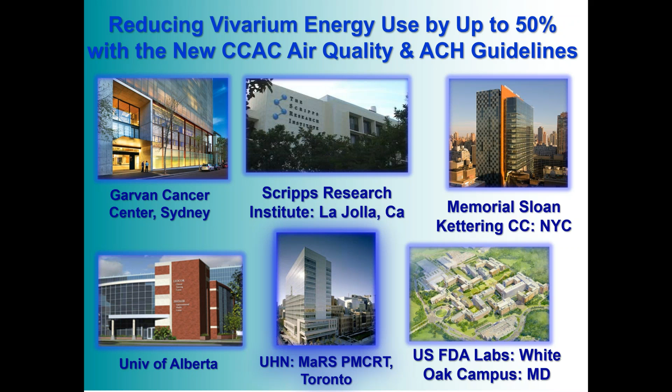So what I want to get into is a little bit about demand-based control, a little bit of the guidance from both the U.S. and CCAC, ILAR, and more details about the guidelines, the addendum coming next year regarding that. Also demand control and how the supporting committee moved the way it did, and then a little bit about the economics and why it makes sense for people, particularly up in Canada.

With that in mind, let's get into this. So, I want to reduce energy in vivariums. The key driver for the HVAC system is that it's 60 to 80% of the total energy use of a vivarium. Regarding high-rise facilities, it's definitely the dominant factor by a far margin. And the air change rates required in vivariums, at least...

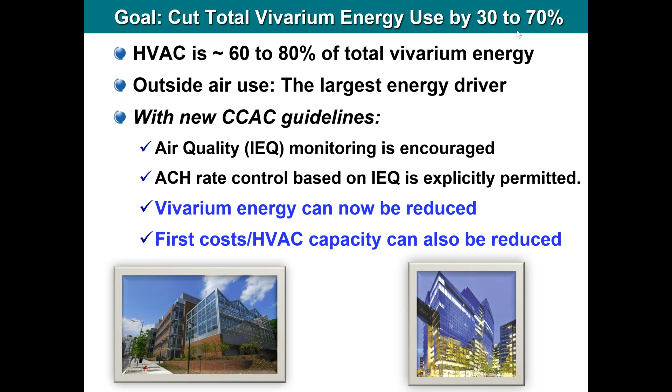Now, with the new guidelines, they get into the issue of air quality within and encourage the use of monitoring for that. But also, if you want to reduce the energy use in the vivarium, then a demand control system that reduces based on the measurement can both dramatically cut energy use, but also HVAC capacity and first cost. And it wasn't allowed before, but now it is allowed with the new guidelines, which we'll get into.

So again, a little bit about vivariums and the various aspects. I think it's always important to understand and get grounded on how airflow requirements work at these different levels and how they are controlled. What we have is three main drivers of airflow within these facilities, vivarium or lab. We have exhaust requirements - this could be biosafety cabinets, could be exhaust from the animal racks. These device airflows result in a need to compensate. That one requirement is based on the amount of devices, and you can change based on what the devices are doing. If we're talking about animal racks, we have racks that are less or more, and they affect the airflow as well. In addition to that, we have a thermal load component.

Maybe I can interject just really quickly, Gordon. We're having a little bit of distortion in the audio in your presentation. Is there a way - just wondering if you're currently dialed into audio by phone or if you're connected through computer-based audio? I'm using the phone-based audio. Okay, and are you on a voice over IP system? Just a regular cell connection. Interesting, because the audio seems to be garbled at times, but right now you sound fine. So maybe what we could do is continue, but it does seem to be getting distorted off and on. So we'll monitor it, and I might have to interject to see if we can source a different audio connection, or maybe switch to computer-based audio if it continues. So let's continue. Yeah, we'll see.

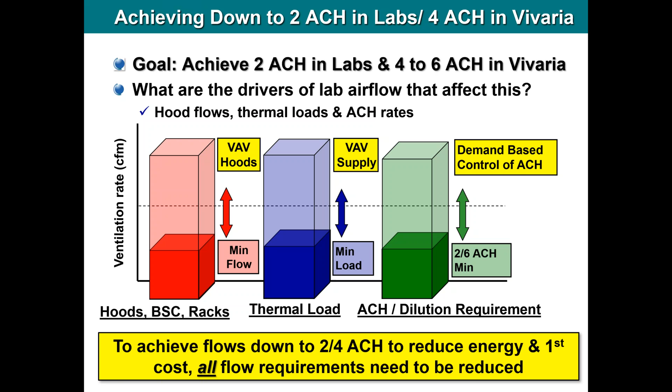The other aspect can be the requirements for the thermal load. So let's take a look here. When you look at animals, and even with ventilated racks, you have a requirement typically in the range of about 4 to 8 air changes. It depends on the racks and the density, but that's typically the requirement.

Sometimes people think that since the rack is exhausting air, even if exhausted directly into the ventilation system, that takes away all the heat. But actually, most of the thermal load is due to radiation from the rack itself. You can't get rid of it just by exhausting some air - it helps a little bit, but most of the load goes right into the room.

So typically for these spaces, to cool the space based on a typical animal loading, you're in that range of 4 to 6 air changes - we won't be able to get below that. So we're going to reduce airflow, but we have to provide at least enough to maintain that thermal load, the cooling requirements.

Now, non-animal holding areas - in a vivarium with many different rooms, we have the animal holding rooms, we also have rooms for surgery, for different aspects of engagement with the animals, cage washing, etc. In these spaces, we don't typically have as high a thermal load, so we can reduce it down to maybe the range of 2 to 4 air changes.

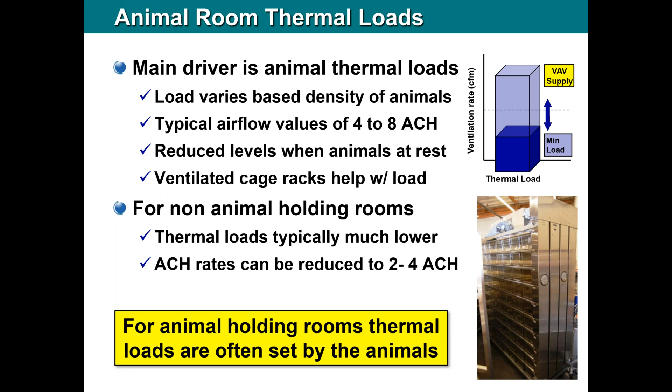The driver for airflow in these spaces has traditionally been the ventilation requirement, and that's where demand-based control comes in. The idea is that these requirements exist due to the potential for pollutants and contaminants - particles, particulates within the room, ammonia, volatile organic compounds (VOCs).

So the point here is that if we can sense when the air is clean, which turns out in vivariums to be very high - typically in the range of 98%, or for some spaces maybe 96 or 99% - it's at that very high level most of the time the air is clean. It's just that things can happen from time to time that require greater airflow, which is why we have it. But if we can sense the contaminants, and when the air is clean, we can reduce the airflow.

When we need that airflow, we want to go up to the 15 to 20 air changes typically recommended. But if the air is clean, we can drop to the lower levels.

This is typically going to be set by, could be the rack requirements, but as mentioned, it's probably more likely the thermal loads that set that range, maybe 4 to 6 for the vivarium airflows. For the non-holding areas, it could be lower, in the range of 2 to 4 air changes. So that's the basic concept behind demand-based control.

The question is, is that allowed? What's been the recommendation around this?

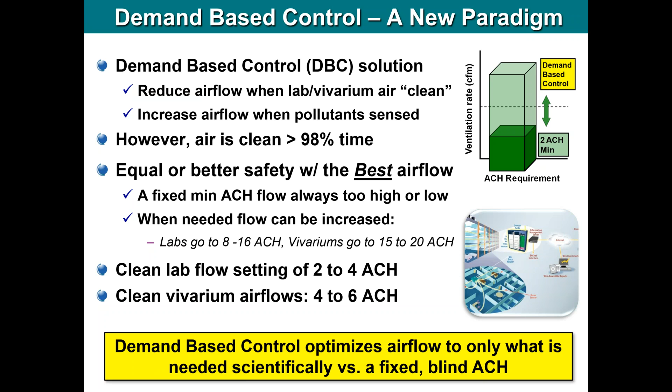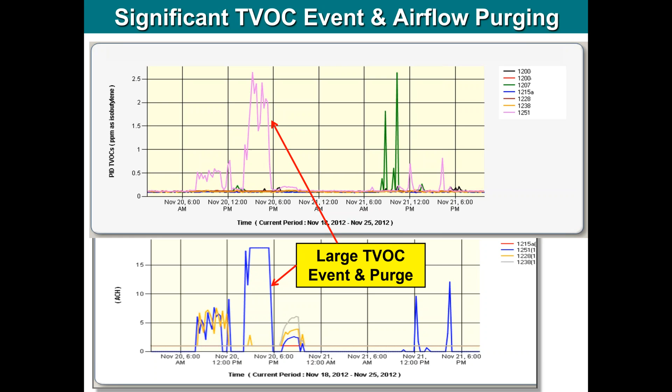In addition to saving energy, there are other benefits to sensing air quality in vivariums, and a lot of it relates to understanding what that environment is. In a research situation, we want to control variables, so air quality within the space can have an impact on the animals, which can have an impact on the research. So it's very important to maintain a clean environment, for both ethical reasons and research reasons.

Monitoring the air quality allows us to assure that we have a good environment, or if things go wrong, we can diagnose those things quickly, understand there's an issue, determine it, and resolve it. Monitoring air quality allows us to ensure that the air quality will be good, because we now have direct feedback of what's happening, whereas typically we don't. You might monitor for air changes, pressure, maybe lighting, but not directly the airflow or air quality, which is such an important factor.

And again, it's not just the animals. Part of the reason for this airflow is also for protection of the people. One of the big concerns here is allergens within the space and people getting sensitized to that. So we want to detect that and make sure the air quality is good and people will be protected from those contaminants.

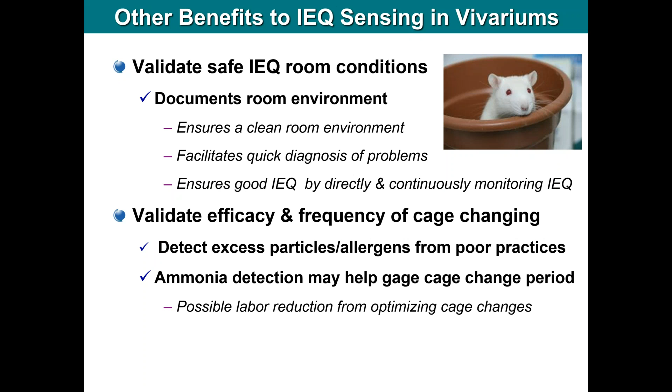The other aspect this is sometimes used for is to look at how often cages should be changed. Typically the reason for the cage change is to prevent buildup of ammonia and allergens within the space, and this provides one way of directly seeing what's happening, and then as needed, optimizing the cage changing frequency. So there's potential labor savings there, and also another way to improve the air quality.

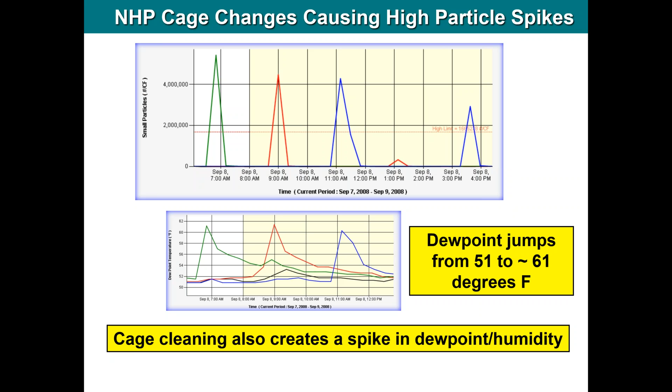What I have here are some diagrams showing the type of things that can happen. This is some non-human primate cage changes where you can see we're creating significant particle spikes, relating to the fact that we're cleaning the cages. You can see not only the particle levels go up, but the humidity goes up as they were washing the cages. During those periods, we would be increasing the airflow. You can see in this diagram that the airflow spikes up to try to purge the space.

In these situations, air quality monitoring is helpful because even though we're providing greater airflow, the intensity of the particles is pretty high. At that point, you probably would be recommended to use some PPE, some protection equipment for the employees, just to make sure they don't get overly exposed during those cleaning processes. So not only can we control the airflow, but we can provide feedback that might improve operations and improve safety for the operators.

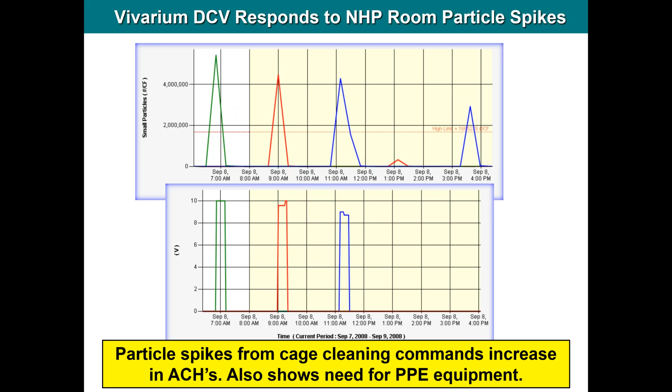What we have now is some information on the guidance around other areas in terms of this aspect of demand-based control. Since 2011, this has been recommending this concept both for labs and vivariums. This guidance specifically relates to laboratories. They use the term real-time sensing of contaminants - that's their word for it, my word is demand-based control, but exactly the same thing. It talks about, at least in laboratories, going down as safely as 2 air changes per hour, when the lab air is clean.

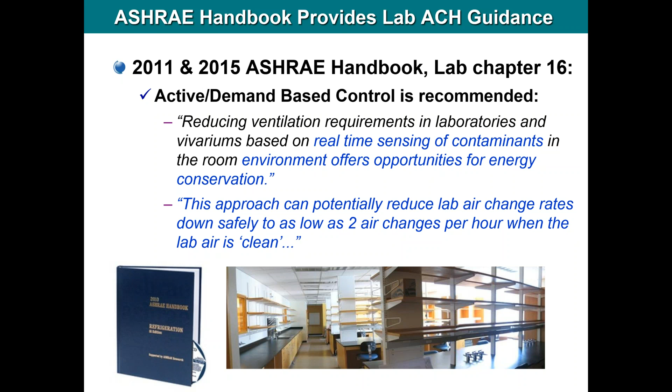So when we get to the vivariums, we have different people weighing in here. ASHRAE weighs in again with a recommendation around the use of active sensing of contaminants. They refer to the secondary enclosure, which is the room. And based on that, you can vary the air change rates.

ILAR, since 2010, has been recommending the concept of varying airflows based on not only heat load, but other variables such as air quality. So that's been in place for some time. AAALAC, which works off from ILAR, also has been actively recommending the use of this concept, allowing you to go below the 10 to 15 air changes.

Part of this is that there's been a drive towards performance-based criteria. That's really what happened is AAALAC moved away a little bit from the prescriptive and says basically trying to focus not just on air quality, but in other areas as well around performance-based criteria, that if you can achieve the end result, then you don't need to be prescriptive. You can allow for other concepts and approaches that can provide a more optimum approach as long as it achieves the intended results, in this case, air quality.

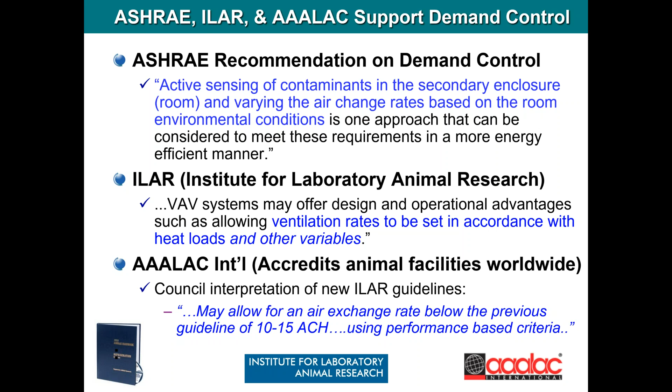So for some time, this has been the case. Now, in Canada, that has not been the case. And in Canada, a little bit different from the U.S. and some other areas, there's been more of a mandate around air changes.

Now, actually, from a global standpoint, the other area where this is true is also the UK. So the UK has very similar guidelines to what Canada has had around this requirement for 15 to 20 air changes. I don't know why those are probably related to some focus in the two countries, but in any case, this has been the case in both the UK and Canada.

Now in Canada, you can see not only is the requirement for 15 to 20 air changes in terms of the airflow, but also the systems, the HVAC system has to be capable of supplying 15 to 20 air changes in each of the spaces. So that has resulted in large HVAC systems that can handle this volume of air, which is going to be needed even if the room isn't being used. Obviously you don't know when that's going to be, so the HVAC system has to have that capability.

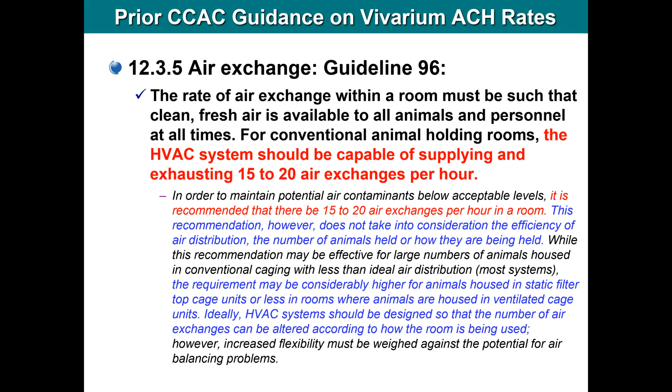And as you can see here, it's even saying that sometimes you may need more than that airflow as well. So this has basically been the requirement up until really this year. And based on this, there was a movement beginning about 2010, based on what had happened with ILAR, based on what AAALAC was then recommending, and seeing this concept being used.

Up in Canada, with the CCAC, they started a movement to look into this. And one of the concerns was to be a little bit more prescriptive around it. If you notice what ILAR and AAALAC have said, it's more performance-based, but it doesn't list what the performance is. That's sort of up to the local facilities to basically determine that and then maintain that over time. So it's like a quality guideline where there's not a specific aspect of what the quality is, but whatever you pick for your requirements, you have to maintain that.

Now, what the CCAC wanted to do is said, well, we want to be a little bit more prescriptive around that. We want to set up what the performance guidelines are, and then based on that, as long as people meet what those performance guidelines are, they can use what airflow they want. So it's a little bit different than, let's say, AAALAC or ILAR, which leave it much more general. Again, the CCAC wanted to be more specific.

So beginning in 2010, there was a move to investigate this, to understand what were either the recommended levels or the levels of air quality that would be prescribed, and then based on that, the airflow could be varied to meet those requirements. So this started in 2010, started frankly a little slowly, but began to get momentum. There were different drafts that came out, some feedback came back, and so it went back and forth several times.

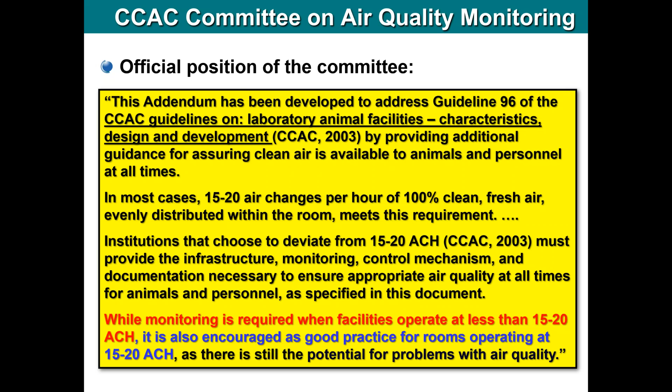But at the same time, a lot of this guideline or addendum focuses on air quality and recommends monitoring of air quality, even if you're not going to reduce the air changes - it's just good practice. And as you'll see, we talked a lot in the standard about what is good air quality, and some ways to monitor it and provide that good air quality.

One of the things that came up when we were doing this addendum was trying to understand what is the cause of poor air quality, or what are the causes of things that can happen within a vivarium space, which relate to why we should be monitoring in the first place, but also why we have air change requirements. Sometimes people say, we've got ventilated racks, they keep contaminants out of the space for the most part, so why do I need higher air changes? So we thought it was important to lay out what we believe were the sources of these contaminants, and we broke it down into 3 different areas.

We generically labeled them systemic, operational, and episodic type situations. Systemic issues relate to system aspects - the design and maintenance of the facility, the HVAC system, how the system is being used. This would be, for example, the type of enclosures.

Is it open cage? Is it ventilated racks? What type of exhaust configuration - is it a direct exhaust, or is it exhausting into the space, etc.? So those were things that affected the air quality, and hopefully they're designed well so that it creates a clean environment.

You then have operational issues - how do we operate the facility? What are the standard operating procedures? What's the type of animals we have? What's the density? What equipment do we have in the room? Are we using cage change stations, for example?

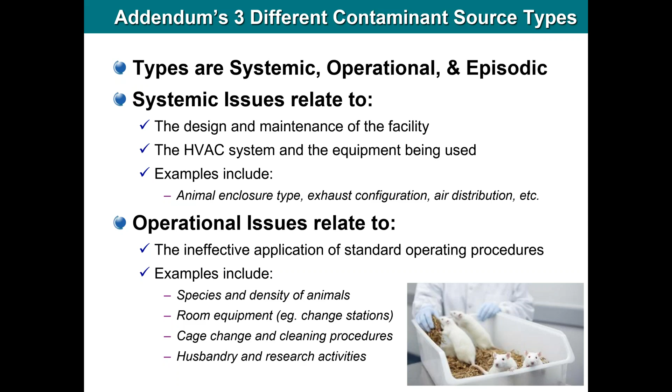One of the biggest concerns, though, relates to the last factor, which we call episodic. Frankly, this is sort of in the category of stuff happens. You do the best you can, and then things happen. The result is that these don't always happen and they can't be predicted. They're not necessarily related to the fact you have good systems or operational approaches.

But again, things happen. Maybe the training on someone isn't quite effective, or someone begins to forget his training or isn't applying it properly. Just classic human error. Equipment that breaks, equipment that fails. Things like this can happen.

And again, because of the situation we're dealing with, where the quality of the air is very important in this facility, both for the level of research but also for protecting the individuals, these are concerns. Typically what you find is that these things can be very short in duration. As I look at data we've monitored for many years ourselves, you see these sort of little episodic events.

That tends to be what's generally happening. It's not the long-type failures related to the systems; it's things that generally are detected and cleaned, or basically resolved. But it's these shorter things that happen that may not always be seen if you're not monitoring things continuously.

So this is where monitoring becomes important, to catch these sort of things and resolve them. As an example, sometimes with ventilated cages and good SOPs, you might think you're in a good situation, and hopefully you are, but it still can't eliminate these episodic events. Maybe someone drops a cage, or at a cage change station the filter breaks through because it wasn't changed as often as it should.

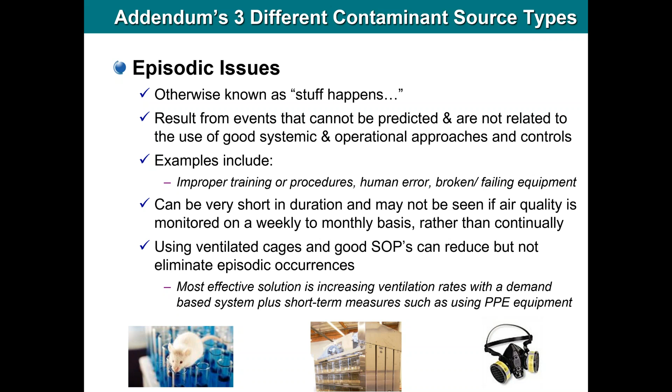Based on that, the committee said, all right, with all this in mind, what are the different ways that the Vivarium could be operated, and how can we provide a means potentially to save energy by reducing flows while still maintaining good air quality? We came up with three different scenarios, or modes of operation, that the Vivarium will be operated under. In most situations, you're going to fall into these three categories.

The first one is obviously what we've done before: constant flow, no IEQ monitoring. In that case, the committee is saying 15 to 20 air changes applies. The recommendation is it's good to do some form of IAQ monitoring, but it's not required. It's sort of the status quo, I guess is the way you could put this. So people can continue to do what they're doing, not a problem.

The second category is that we do apply some form of IEQ monitoring, although we're not changing the flow rates. What the committee has said is that can allow some reduction in air changes, down to about 12 air changes. But it does require IEQ monitoring of some type, and that falls into two categories of IEQ monitoring that we specifically laid out in the document.

One is obviously straightforward, the continuous monitoring. In that case, we're basically picking up samples or monitoring the air quality in the space at least every 15 minutes, doing that on a 24/7 basis, recording that data and allowing it to be reviewed and monitored.

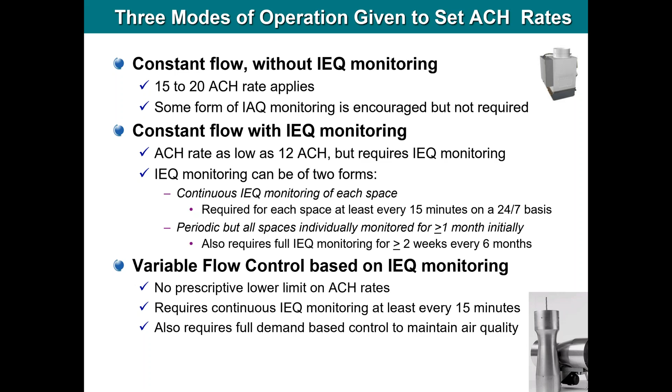Okay, so with that, let's get into the actual guidelines that were laid out in the document. So there's a bunch of guidelines. Guideline 1 basically begins to lay out how this thing works.

So the idea would be that, generally within normal operation, we're trying to maintain levels at or below the target value, with the understanding that at times you may get excursions, which is obviously when you probably want to provide full airflow, and then you'd hope that you'd be returned back to the target value and not exceed the maximum values. If the maximum values are being exceeded, then obviously something's probably wrong, not necessarily with your airflow, but with, well, could be that too, but probably there's other issues in terms of the design of the facility.

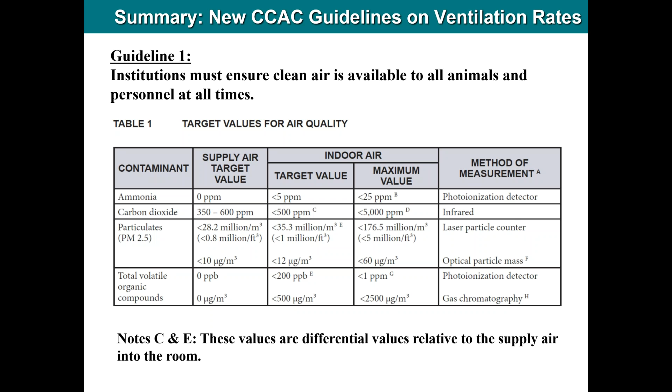Okay, so basically what we have here is some more of the guidelines. Now we're getting a little bit more specific. Guideline 2 relates to that we can operate at lower than the 15 to 20, but again, you need to monitor and record the air quality contaminants, and ensure mechanisms are in place to correct the deviations.

Number 3, we started to get into the more of the specifics, getting into the contaminants. Again, as I mentioned before, it's ammonia, carbon dioxide, particulates, and of course VOCs, total volatile organic compounds.

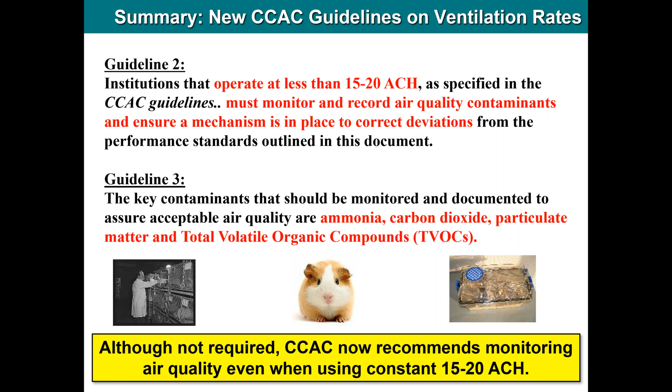Then the guidelines get more specific now into talking about the levels again, which is sort of what you saw earlier. For ammonia, again, we want to maintain it below 25, but in general not exceed 5. CO2, we want to keep it below 500 ppm. Particulates, we have there the 12 micrograms per cubic meter, basically relating to a 0.3 micron channel. And then VOCs, you see, is in the range of 500 micrograms per cubic meter.

Some of these measures, like the 500 micrograms per cubic meter, or equivalently 200 parts per billion, relate to levels you would see for the LEED requirements for flush out in office buildings. So it's a pretty clean level that's being recommended here, but I think one that's definitely achievable and easily achievable, unless there's some problems with the systems.

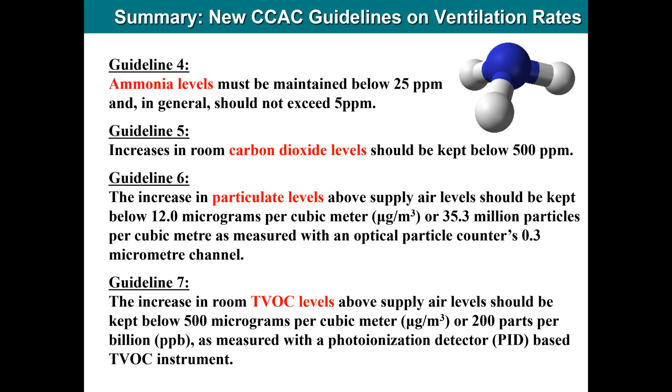The other aspect was the capacity. So the other aspect of this guideline opens up the ability to now design a system that doesn't necessarily have to be designed for all the rooms running at 15 to 20 air changes. Obviously, with a demand-based approach, some labs, some areas, some Vivarium areas, holding rooms may operate at the full airflow, but it's highly unlikely that all would run at the same time at that level.

So the guidelines now open up the opportunity to apply diversity factors that allow you to reduce the size of the HVAC based on how you expect the system is going to run, based on thermal loads, etc. It's similar to how this is done in laboratories. This is now allowed, whereas it wasn't before. So now you can reduce this down. Obviously, you need to analyze this carefully, but there's definitely some opportunities now to reduce HVAC equipment sizing for these spaces.

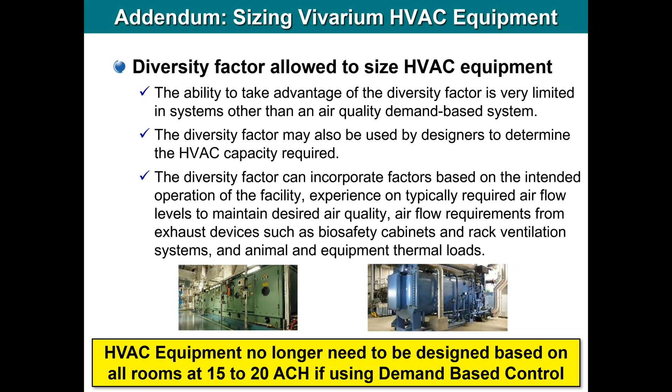Okay, so that gives you a good overview of what the guidelines lay out. What I wanted to do here is present some of the evidence and data that was used by the committee, in terms of coming up with some of the numbers and values.

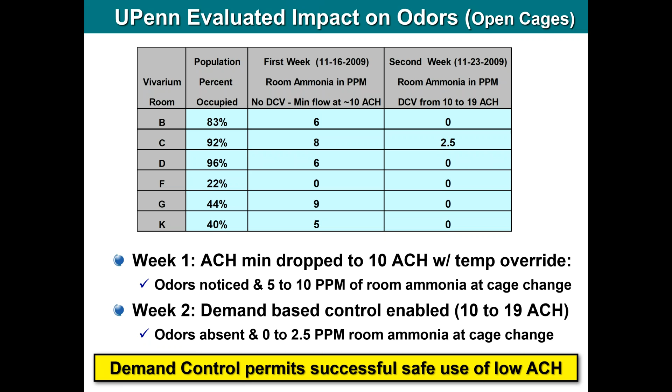But then in the second week, they applied a demand-based control approach, which applied airflow when needed to keep the odors down and prevent them from building up. And obviously, you can see it worked quite well. So this provides some of the basis for this concept.

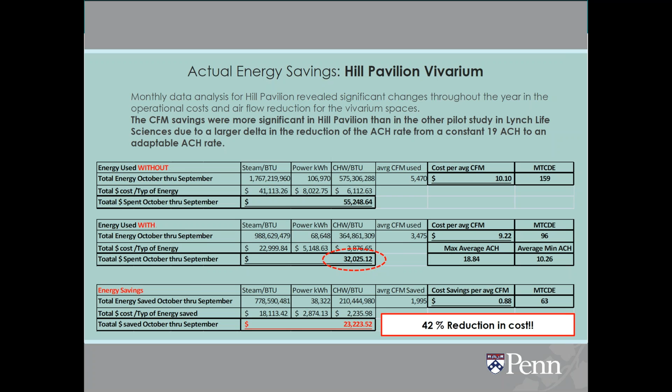And you can see this is just showing some energy savings. Obviously, they achieved significant savings in this case. It was 42% over the whole facility, and the animal spaces weren't obviously the whole facility. So again, quite a significant reduction.

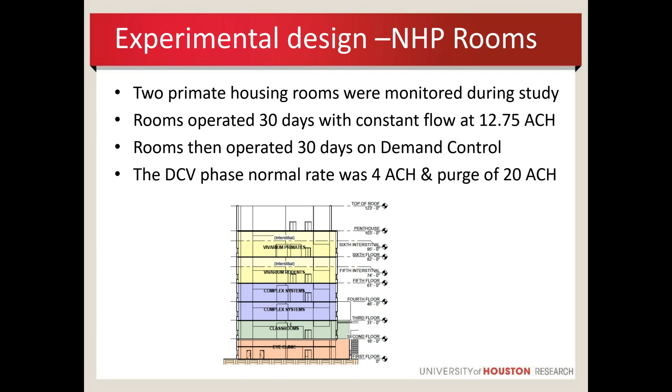Dr. Brammer's done some research on this. He has some systems, both with non-human primate as well as animal facilities, and he had 2 rooms. In both cases the rooms were operated for 30 days with constant flow control at 12.75 air changes, and then also 30 days with demand-based control running at 4 air changes and a purge at 20. The results were that you could find no appreciable difference in the air quality for both the constant airflow or the demand-based control operation.

He did have times when the system needed to go to higher flow, up to that 20 air changes, about between 1 and 5% of the time, based on the type of rooms there. But again, obviously, it cleaned the air and kept the air quality good. Significant savings were achieved by being able to reduce their airflow rates.

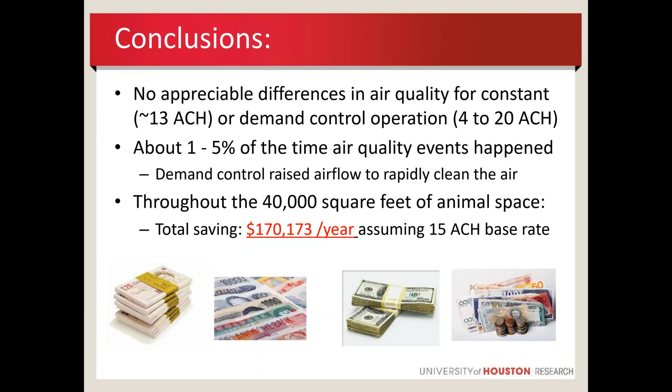Another example of this was the Memorial Sloan Kettering facility down in New York City, a very large project, both labs and vivarium. Basically significant energy savings, even got a large rebate from Con Ed. So supplied a very large project at a large scale, obviously quite successful.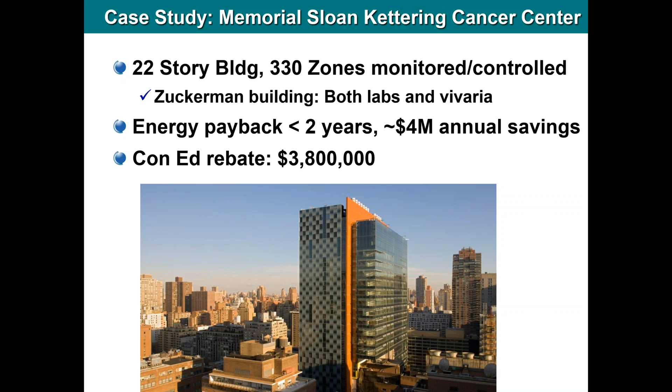So again, obviously this has been used before. It's been used around the world, many different areas. The exceptions have been, as I mentioned, both the UK and Canada because of the requirements that have been in place in the past.

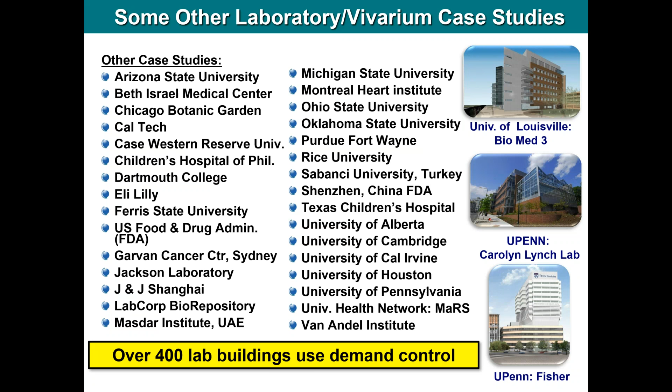To look at that for a vivarium. In this sort of typical situation, I've got a 30,000 square foot vivarium. That's net square feet in terms of the animal spaces. I've assumed 100 rooms at an average of about 300 square feet. I've got a baseline situation with 15 air changes, and I'm assuming we're going down to 6 occupied, 4 unoccupied. However, sometimes we're going to be higher than that based on the thermal load, so I'll mention that in a second. In this case, I used Boston for the weather data, just as a convenient location.

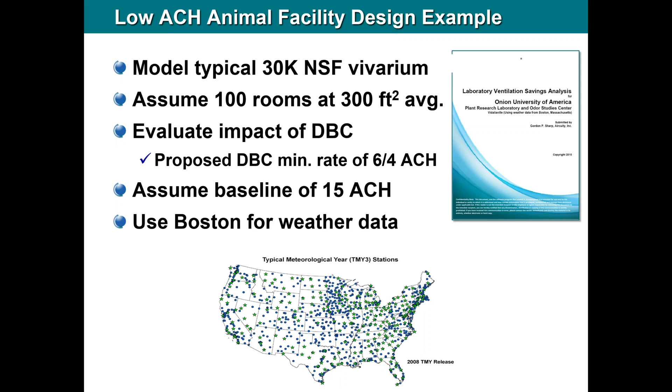So in this case, I got the room temperature set to 74. We've got some other assumptions about energy costs. In vivarium, we typically have humidification, so it adds a significant increase in cost. So I've got steam humidification. And then, as I mentioned before, I have some thermal loads, and those are going to increase some of the air change rates, so we're not always going to be down at that 6/4.

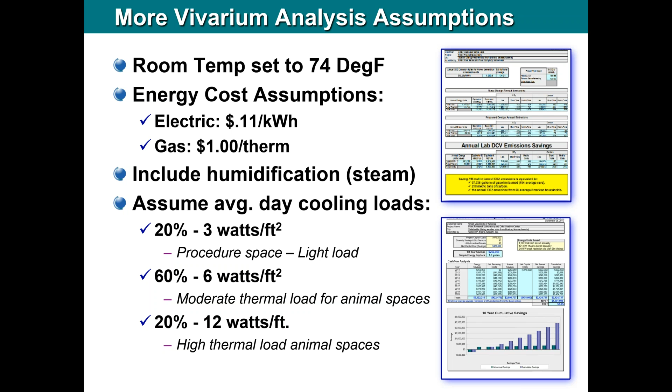We're going to be higher because you can see here I've got some moderate thermal loads that are upwards of 6 watts. That probably is roughly 6 air changes. And then I've even got some spaces, 20% of the spaces, that are very high thermal load. This would be unusual, but I should try to be conservative. These would be highly dense spaces with a lot of equipment. Typically you wouldn't see this, but it can happen, and I did want to model it. So here I've got this involved as well, sort of a little more conservative.

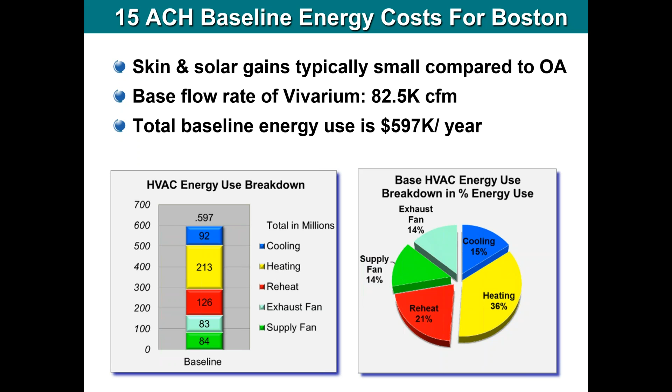So when we look at that and look at the requirements for energy, you can see where that falls on the slide. We've got roughly about $600,000 a year. Obviously cooling, the heating is high. Keep in mind that heating includes both the classic heating, but also the humidification, the steam humidification. That's why that number looks larger than you might expect, and it's related to the steam humidification as well as the heating. That obviously got reheat and, of course, your fan energy.

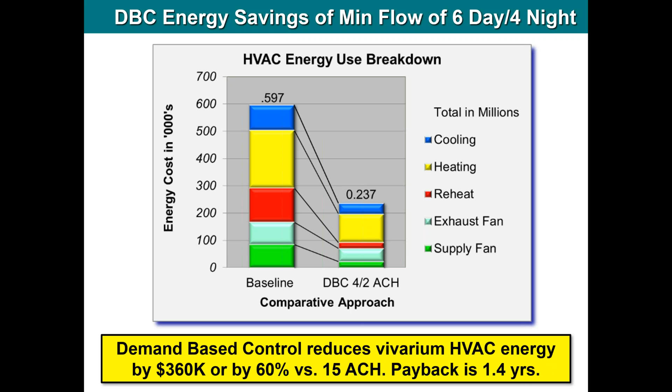So with that in mind, you can now see the difference from the baseline case of 15 air changes and being able to go down to this, actually it's 6 and 4, the graph there is mislabeled. And as I mentioned, it's not always 6 and 4 because some of the spaces will never get down there because of the thermal load. So it's sort of a variation. But with all that in mind, you can see the energy has been significantly reduced by literally 60%. You can see that huge reduction in reheat, but also fan energy, and of course the steam and cooling. So the payback in this case was about 1.4 years, so obviously quite a significant benefit.

Now, as I mentioned earlier, we also can reduce first cost because now that we've reduced the airflows quite dramatically, most of the time, or almost all the time, that allows us to take advantage of that, and even with some very safe assumptions around diversity, we can still achieve very significant reductions in capital costs. So what you're seeing here is a...

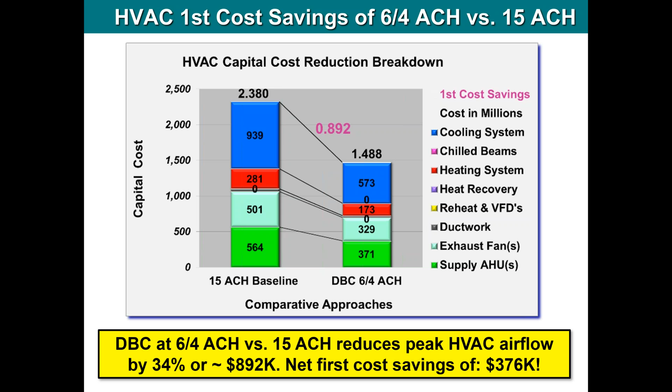Just wanted to check here.

So let me just finish up and open it up for questions. I've got a note that the audio connection was lost, so hopefully everything came through okay. But with that, let's open up for questions, and we have a little bit of time for that.

Thanks, Gordon. Can you hear me okay? Yeah, I just saw a little note saying I'd lost the audio connection, hopefully that wasn't the case. But yeah, it does appear that even after we switched over, there were a couple spots where we lost you for about 5 to 10 seconds, but you bounced back in. By and large, the audio quality did improve once we switched over to computer-based audio.